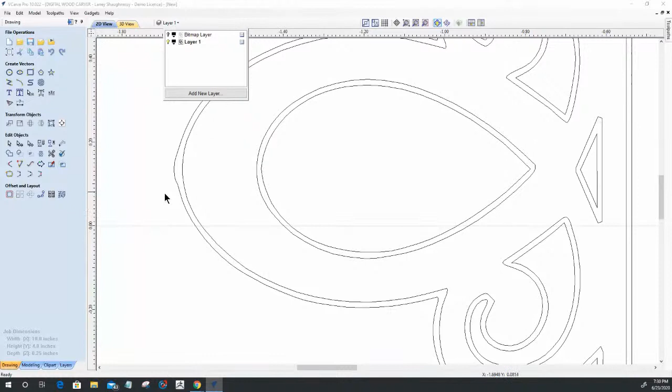So we'll crank this up to 4, then click preview, and that will trace the image. There's a couple of little nips right here on the end that we'll clean up in a minute. But for the most part, once it's a decent tracing, you click apply, close, and then turn off your bitmap layer and all you'll have is your tracing left behind. You'll see here we got a little nub sticking out there, which we'll clean up in node editing. But aside from that, let's turn that back on and undo.

There's also the black and white trace within your photo. It takes the image you have selected and converts it to black and white. Again, turn that fading off. In this case, there are no colors to trace or check off, just a slide bar that you slide back and forth. What you want is the best representation of that black and white image, with nice, clean looking lines, and then come down and repeatedly do the same thing.

I'm going to use the default corner fit, and I'll have my noise filter at about 4. Click on preview, then apply and close. Again, turn your bitmap layer off. Same steps, rinse and repeat for that.

Now, to take this a little bit further, some images are not going to trace completely clean.

Therefore, you're going to have to do some node editing. In this image, all the way around, I have some node editing to do on these corners of these triangles. They should not be blocked off like that. They should be nice lines, nice points. They shouldn't be rounded at all. That's a product of the tracing, and you're going to get that regardless of whether you're using black or color tracing.

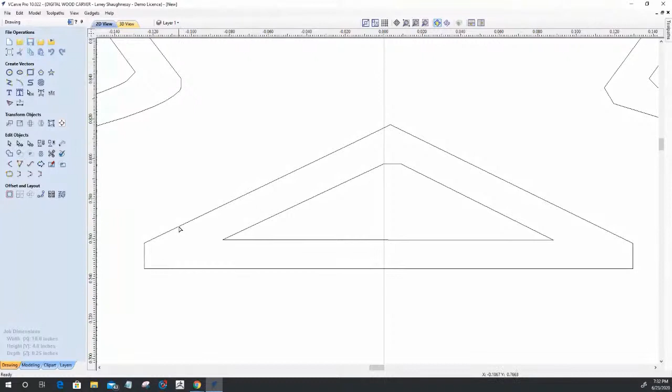In the case of the node editing, I'll start out here and end up deleting these two spans, delete that one there and that one there. While I'm in node editing, since I'm working in this area, I'll delete this span as well. A span is a line, arc, or curve between two nodes. So I'll remove that, and then I can come back with my extend tool, which is the second icon on the third row of your edit objects tools, the extend tool. I can come over here and just click, click, click to extend that, and to clean that vector up. I'll end up going through all the way around.

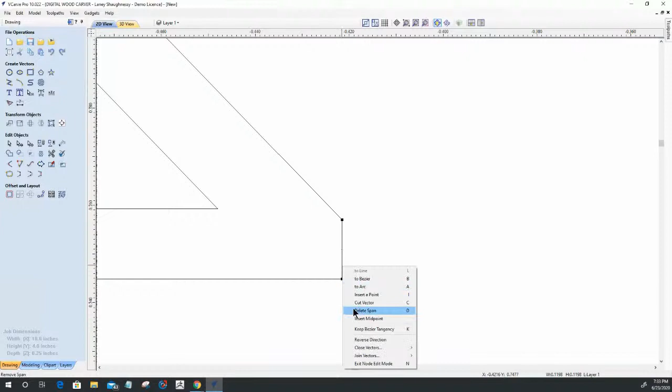Sometimes you're going to have to do that, you're going to have to clean up your lines and things. So just be aware, in node editing on the keyboard shortcut, that not everything is always perfect. There are going to be some bits of cleanup, and you can choose whether or not you clean it up or leave it be. But the higher the resolution of that image, the better trace quality you're going to get.

As far as that little nub there, I'm going to come over and cut the vector probably right about here. I'll just pick two random spots, go right about here, and I'll remove that bad segment. Then I'll take this object and rejoin it with a smooth curve. 90% of the time it redraws it exactly as I need. The other percentage of the time, I may have to go in and node edit it and do some adjusting, but that one actually came out very well.

All right, cool. So hopefully that answered a little bit of your questions on bringing an image in and tracing it. Just be sure to always close your tool when you're done, and of course turn that bitmap layer off, because you no longer need that image visible once you've traced it.

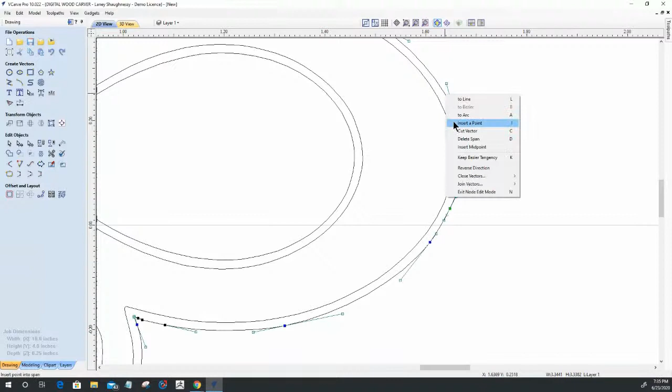And the same goes while we're here, might as well clean this one up. I'm going to cut the vector here, and I'll just pick another spot over here and cut it. Remove that bad segment, and then select that vector and join with a smooth curve.

Now that one threw the curve off. You see it kind of jumped up there, so I will have to go into node editing, and I'm going to adjust that accordingly and clean that up.

It's a little bit thinner here than over there, so let's take this and pull this out a little bit, and pull this back. I'm going to actually use the arrows on my keyboard and kind of pull that in a little. And there we go. Okay, so little things like that.

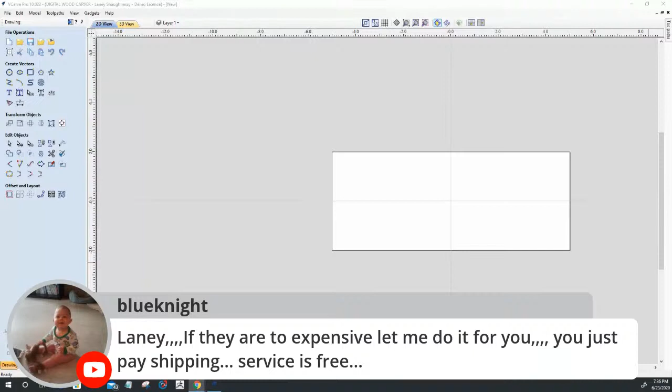Oh, the computer thing? Oh man, Blue Knight, thanks for that. I appreciate you for that, that's cool. Yeah man, I appreciate that. We'll have to link up on that one.

All right, here we go. Let's see here.

And I haven't forgot, I'll draw the circle center finder in just a second here.

Can you explain the difference of using a flat depth and not using it with a V-bit?

Well, first let's understand what the difference is between a flat depth and a cut depth. Dan, that's a great question because I get a lot of people calling me saying, hey, my V-carves aren't carving the same depth all the way through. I put in 1/4 of an inch in the flat depth and some are cutting a little lighter, some are cutting down to that 1/4 inch, and they're not understanding exactly why. So that's a great question.

Before we go any further, let me change my display settings to make things a little bit bigger in the preview. Let's go down and change that to 1280 by 720. Holy cow, that makes things big. All right, let's pop back up here. Now we can see the icons.

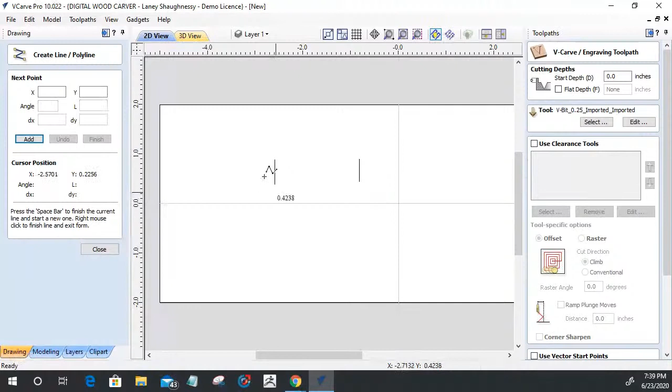Well, that is a little bit different, meaning it's not exactly the same as a flat depth in a V-carve. If you understand a V-carve toolpath, it looks at the distance between 2 lines of a vector. It automatically calculates how deep it needs to cut for those 2 lines to meet at a V at the bottom of the cut, based on the angle of the bit. So if you want shallower cuts, use wider angles; for deeper cuts, narrower angles. Based on the angle of the bit and the distance between the parts, that determines the depth of the cut.

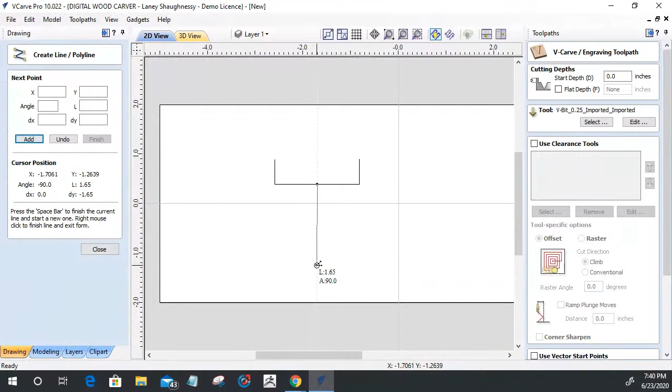Let me put in a center line here. Let me hit the space bar, finish, undo. I'm just going to draw a line straight across there and up, space bar. Let me get a center point in there. That line looks all jagged and it says 90 degrees - that's janky. Let's do that again, find my center, straight down. That line looks pretty smooth.

Okay, so a V-carve toolpath automatically calculates the angle and depth of cut based on the bit. Let's say I have a 60-degree V-bit here. If I was carving with a 90-degree V-bit, which would be here and here, I'm going to get different depths of cut based on that bit.

And so if I want to set a flat depth, what that's going to do is truncate that cut. Let's get rid of the 90, we'll just work with the 60 here. Let's say I want a 1/4 inch flat depth - it's going to truncate that cut.

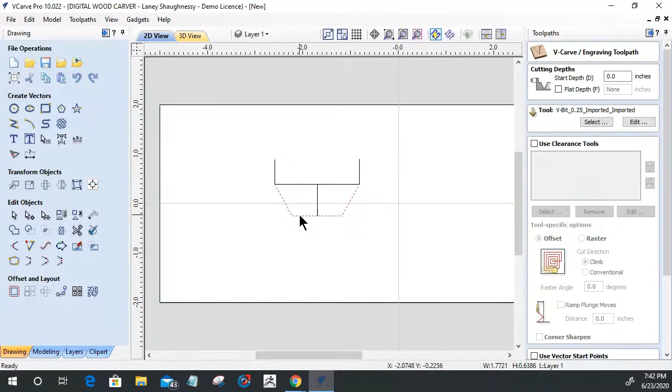Now this flat depth is a limit. If you just remember that it's a limit, not a cut depth, it's a limit. What that means is any part of that design that I'm carving, if whatever parts would normally exceed that 1/4 inch flat depth, it's going to get limited to that 1/4 inch. It'll get truncated and flattened out at that 1/4 of an inch. But if a design has smaller vectors or closer together vectors, and it's only carving an 1/8 of an inch or a 16th or 20 thousandths of an inch or whatever, those are going to get V-cut to their respective depth. But any part of that design that would exceed my flat depth of a 1/4 inch is going to get truncated and cut off. So a flat depth is a limit, and it only limits the area of the design that would normally exceed that limit. Hopefully that explains it, hopefully you'll understand it.

So a cut depth will cut exactly to the depth you specify. A flat depth will limit parts of the design that would exceed the flat depth, that exceed that limit - it'll truncate and flatten them off. So tell me, Dan B, if that answered your question.

So if you don't use a flat depth, it's going to automatically calculate the depth of cut based on the space between the lines of the design. A good example is with letters and things. So let's grab a font here.

Why is my text box not opening?

Okay, there we go. Let's go with the letter B, and let's do a true type font. And let's make that a little bit bigger.

So the space between the lines in these areas here are going to be a shallower cut. The space in these lines are going to be a deeper cut. So that's how you get those different depths of cut when you're doing a V carve, because the space between the lines indicates, and the angle of the V bit is going to indicate the depth of the cut, how deep it needs to cut for those lines to meet at a V at the bottom of the cut.

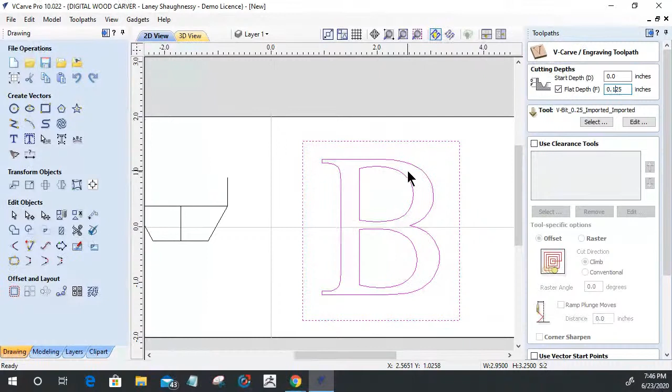And so if I limit this, let's say to 1/8 of an inch, then that's essentially going to be the cut depth of my pocket. And whatever part of the design that's going to reach 1/8 of an inch - all of this design is going to reach 1/8 of an inch - so it will flatten or limit everything to that. And that's how we get that raised effect.

And of course, I didn't use a flat area clearance tool, so you'll see the tool marks, but all those areas between those two lines, the line of my border and the line of my letters, is getting limited to that 1/8 of an inch. And then my big letters getting raised up. Yeah, and that's how we get that raised effect.

So that's kind of the main uses for the flat depth when you're wanting to do that raised effect, or if you're limiting your cut to a certain depth of cut. Cool, I hope that helped.

All right, let's delete that.

And let's get back to here. Okay, let's see what here. Now,

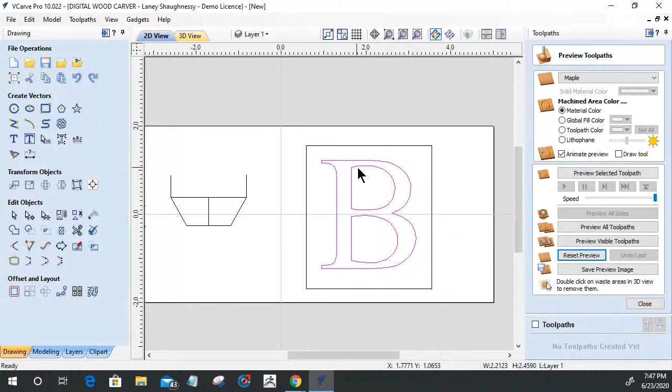Dan, I hope that answered your question. All right, let's talk about the circle center finder. Let's draw out the circle center finder here. Pop back over here a second.

My circle, I wanted it big enough that with the two little dowels in there, when it wraps around that circle, using something like a CD, let me come up here and get in there, sit in there. Oh man, I'm backwards with my camera. There was enough of a span that I could get some nice seating and everything. And there's my circle center finder right down the middle. Look at that.

So the size of your circle center finder, and also its length, is going to determine what size circles you're going to be tracing. I believe my overall length on this was 8.5 inches, and I went with a 2 3/4 inch diameter circle. So if we were to replicate that, let's go with 2.75. That number wasn't specific to anything, it was just the size I needed to use.

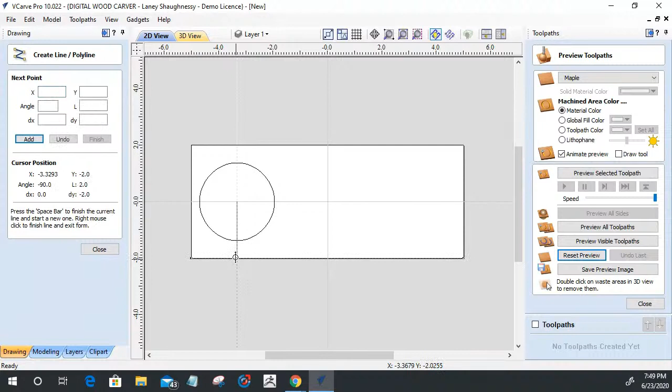So for overall length, let's go from the center here, snap to the center, and I'm going to come out. I'm not going to be able to get my 8.5 inches out of that, so we'll go 8 inches, which is fine. Space bar to finish.

Basically I wanted a small radius on the tip there—a little bit of a radius on the tip. So we'll go with 1/4 of an inch, 0.25, and snap that there. So it's going to end up being like an 1/8 inch radius because it's a 1/4 inch diameter. But if we take our line tool here, I can click on here.

I didn't want to snap to there, I wanted to snap to the side there, buddy. So undo, let's try that again. Bam, there we go. And if I hover my mouse over here, I can hit the letter T on my keyboard and it'll snap to the tangents, and then I can use my space bar.

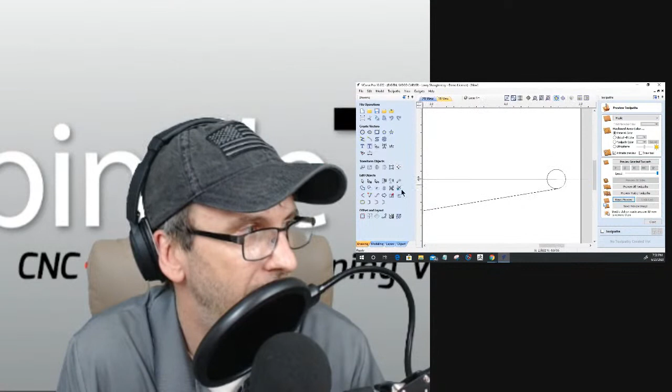Then it's going to be a matter of cleaning things up. But before I do that, I need to extend my line from here to here. And then I can come in and use my trim tool. Oh, shit, ladies and gentlemen, we're an idiot.

All right, let me undo that real quick. You guys couldn't see anything I was just doing, so let's start over again. We'll go with our 1/4 inch, drop that down there. That's good. And then 2 3/4, 2.75, we'll pop that down there. Oh, I was so close to being right on the edge of the board. Let's move that over a little bit.

All right, we're going to take a straight line from the center of this one to the center of that one. Space bar to finish. Then I'm going to snap to the edge of this circle here, hovering over it without clicking, and hit the letter T on my keyboard. It'll snap to the tangent lines, and then space bar to finish.

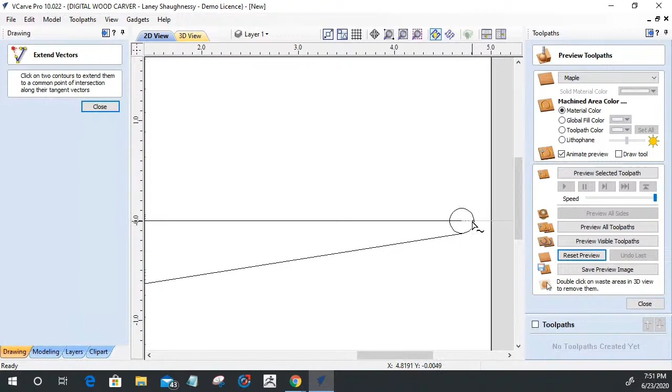And now I can come in and do my cleanup. I'll take my scissor tool and clean this up. Wow, wow. I've got to extend my line—hold on a second. Extend tool from there to there, from there to there. And I can trim that up.

And yeah, there's your circle center finder. Now as far as the placement of the two dowels, I used 3/8 inch dowels for mine. Actually, hold on, let me measure. 7/16 inch dowels. Which 7/16.

So basically the placement really doesn't matter. You want them centered, or kind of centered within this circle, so they wrap well. So we'll back off, center right about there and there.

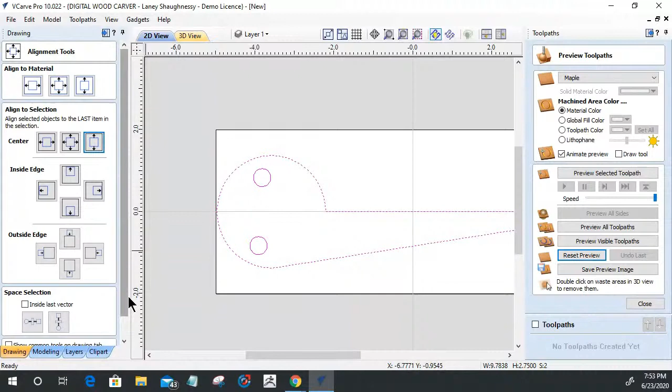And I'm going to take these two objects and group them together for a minute. I'll take this object here and use my alignment tool to align up and down, kind of get them center spaced. Then one of the crucial things is making sure they're aligned with each other. So let's ungroup that—I'll hit letter U on the keyboard, and select this one first. That's fine.

This one second, and I'll use that alignment tool and align left to right to get those into alignment together. And yeah, now you can decide on, as far as the outer profile, you can decide if you want a larger radius or what shape you want.

If you don't want it such a dramatic angle here, what's the main important thing is this line right here. That's your center line and stuff. Now, one of the key things is you don't leave this circle here, right? We want a nice 90-degree line here. So at the center of my circle, let's take a line here and find the center of my circle and come straight up.

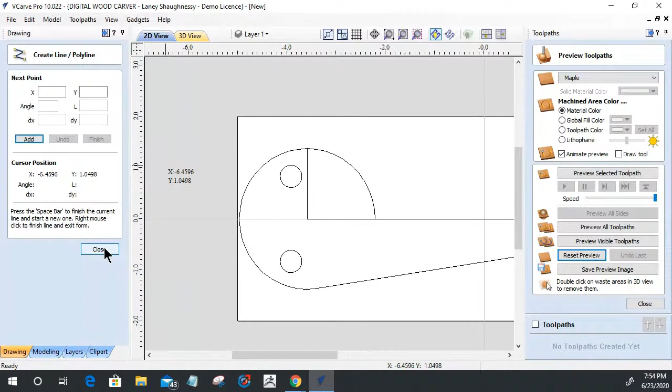Space bar to finish. We'll draw it out here too. Kind of connect those two areas together. We'll take our scissors, trim that up.

And then right here on this corner, I want my router bit, when it comes to turn that corner, I want to create a little relief for it. So I get a nice 90-degree corner with no radius right here. So I'm just going to use the fillet tool. I used an 1/8 inch bit to cut this out, an 1/8 inch end mill, so I'll have a 1/16 of an inch radius.

Not too many decimal points. And I'm just going to put a little fillet, dog bone fillet right there, and that will allow the bit to come. It'll give a place for the bit to escape, and then it can make that 90-degree cut.

And that would be your circle center finder. So if we compared, let me get back over here. So if we look close, oh, here, what would be the better? Here, let me see here. Where's my focal point? All right, so you can see that little fillet. Let me get something behind it.

Either my camera's blurry or my eyes are blurry, one of the two. Let me find my focal point again. Focus, dude. Focus. Why is my camera not focusing for me?

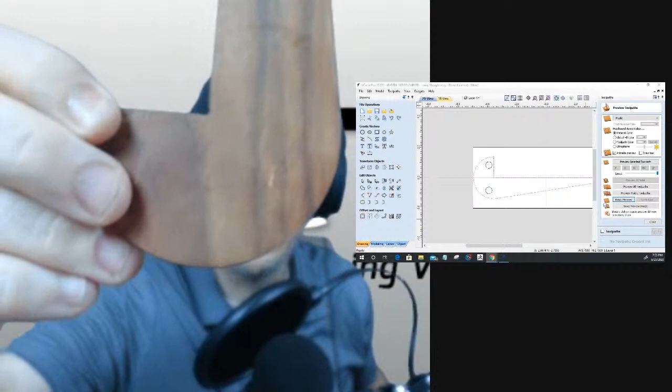But as we zoom in nice and close, a little closer, you can see that little dog bone fillet right there where the router bit has a little place to escape.

Wonderful. And, you know, just the placement of the dowels, really I just come off the center line a little bit, right? So I want the dowels to come off the center line a little bit, have a little bit of meat from here to the edge of the dowel and all. And then just make sure those dowels are centered and make sure they're aligned with each other. We don't want anything kind of skewing it off, throwing it off.

But it's a very simple tool. It takes less than a minute to cut out and glue in the dowels. I used, what did I use? Bloodwood and some cheap birch dowels from Lowe's, right? So, just a little scrap piece I used. This piece of scrap wood, I believe it's a 1/4 of an inch thick. Yeah, 1/4 inch thick. So it's just a nice little tool to have in the shop.

I love making little DIY tools and stuff. I got a big circle cutter for my other router that was made and all, but it's really straightforward for creating a nice little circle center finder. And it's great for finding the center of circles.

All right, all right, all right.

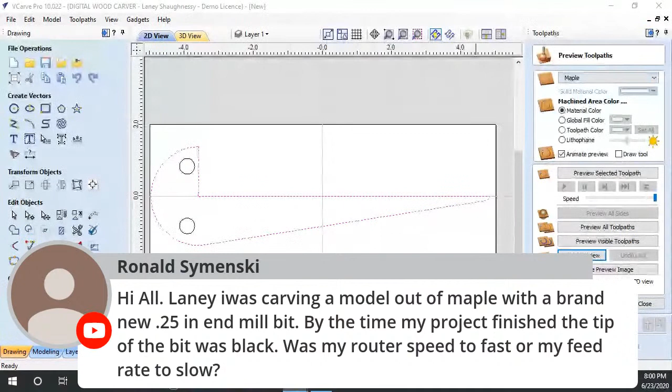I'm not sure exactly what you were running or what machine, but as a basic default for a 1/4 inch end mill: about 55 inches a minute feed rate, about 22,500 RPM. From there, you increase your feed rate and decrease your spindle speed until you get a nice looking chip coming off that piece of material.

Once you find that—if you go too far, if you're going too fast, the cut will start to deteriorate. So if you increase your feed rate and the cut improves but then starts to deteriorate, back it off a little bit.

Same thing with the RPMs—if you bring that down too slow, it's going to deteriorate the cut. It's not going to shear, it's going to more tear through. You've got to bring that RPM back up and find that happy medium with nice chips coming off.

And you don't want chatter. If your CNC is chattering when it's cutting, the bit just can't keep up with the feed rate—you're going too fast, and the bit's not spinning fast enough to clear that material. It's kind of a dance, a waltz, between the feed rate and all that.

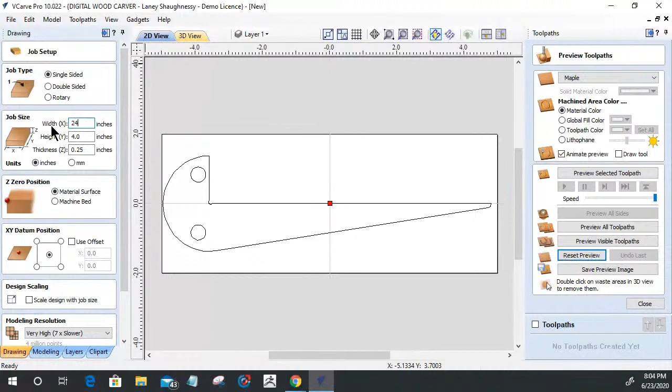let's change some things up here. Let's go into our job size, and let's increase things a bit. Let's go 24 by 24 by 3/4.

Click OK. Let's get rid of our circle center finder. I think you all get the gist of that - pretty straightforward. The center of your circle is where your lines meet, and then you put a little fillet there. That's the magic of it all. How wide you want your tip determines the radius of that curve. All right, I think we got that.

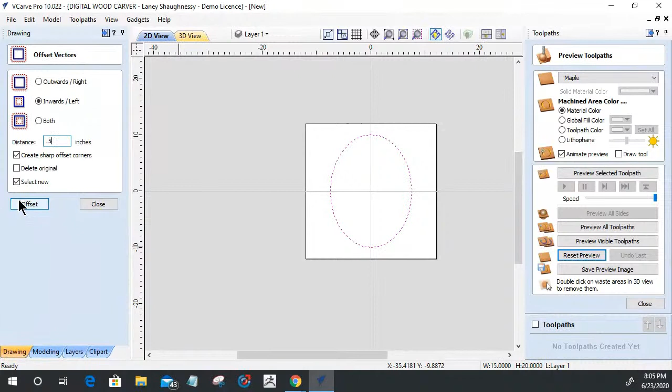Let's start here, and I'll use an ellipse. Let's come in here and throw an ellipse in here. Let's offset that inward by... let's go 1 inch.

All right, wonderful. Now I'm going to import a vector into the design, and it's been a while, so let me see if I can find the correct location for the vector. It's in my backup drive. All right, there it is.

Let's find a cool letter here. What would be a cool letter? We'll go with the W. Import. All right, so there's my W there.

Let's size that bad boy up. Hold on to your horses. Okay, not that big. Let's size that down some. Move that over here. Let me change my ellipse a little bit. Let's hold down the shift key, scale that up a little bit and out a little bit.

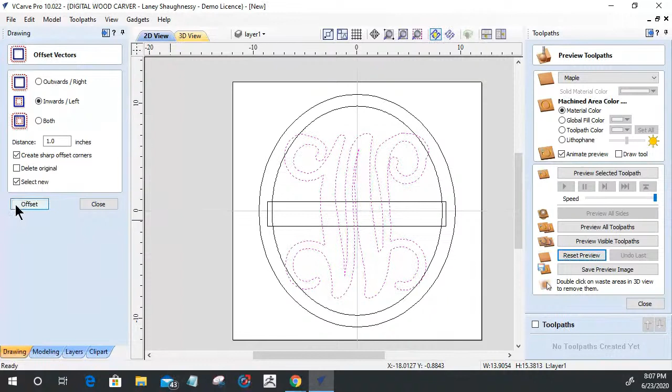All right, so let's see here, what's a good... sorry if my audio blinks out on you guys. Let's offset this rectangle inward. Let's go, I don't know, 1/4 of an inch. Oop, not that one, you silly goose - the rectangle. There we go. Yeah, let's go 3/8, 0.375.

All right, let's take these two rectangles here and make that just a little bit taller. I'm going to hold down my shift key and kind of pull that up a bit. Right, something like that. All right, so let's say that the last name is - okay, let's close one of these.

We don't need both of these windows open so you guys can see things. All right, let's see here. Watsons, right? Waltons, right? Let's do the Waltons. The Waltons. All right, cool. Let's get the Waltons in here.

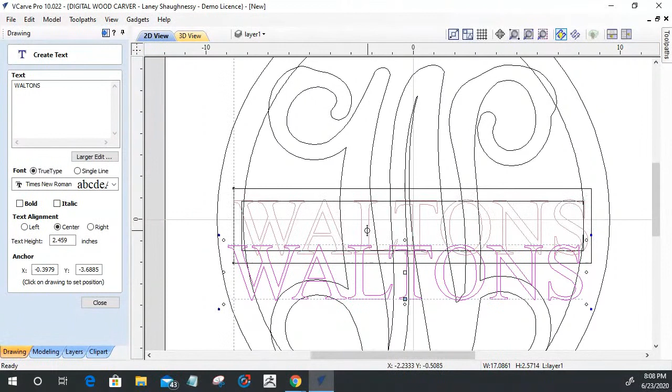And what I'm going to do, I'm actually going to close that, and undo that, because I'm going to use this rectangle right here to draw that name. So I'm going to use draw vectors, draw within a vector box, the text, and I want to use that vector box as the boundary. So that way when I type in... I might be going off the rails here, guys. This might not even be answering any of the questions you were referring to, but hey, what the heck.

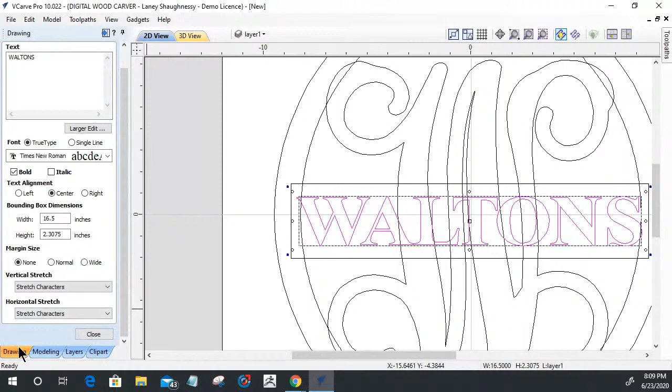Let's see, pick a letter, any letter. We'll use... I'll use Times New Roman. That's fine, we'll go bold, and I want no boundaries, so I want to stretch it out to there. And then I want to extend - I want no boundaries, and I want to stretch my characters vertically and horizontally on that tool so that it extends out completely to that rectangle.

And then where the magic takes place, I want my top line here and my bottom line - I want those to overlap ever so slightly on my letters. So I have a choice: I can either stretch my letters or move my box. I'll just stretch my letters up a little bit, so I'm going to stretch them up to where they just pass that top line right there in that rectangle. And I know the W is behind here - let's move the W for a minute.

And then down here on my letters, let's pull them down. I just want a slight bit of overlap right there on that inside box. All right, and I'm going to pull my letters inward, and I'm not holding the shift key there. There we go - I'm going to pull the letters inward slightly, right about there. That looks fine and dandy.

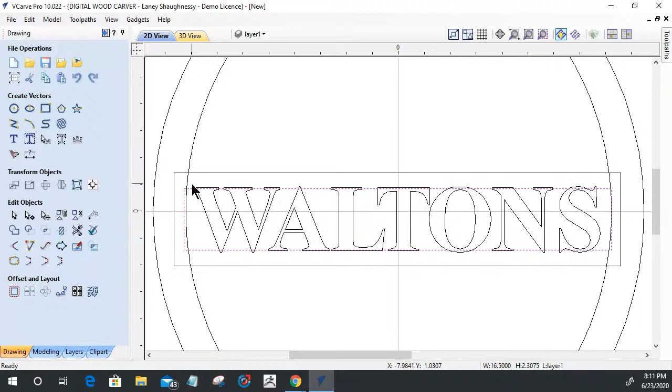If I use my letters as a boundary and take this rectangle, clearing it from within that boundary, it's going to redraw the rectangle around these letters. It's a magical thing. I'll use the trim tool, not subtract, and select my rectangle first and my text last, holding down the shift key, which makes my text the boundary. Clearing inside that boundary will redraw those vectors around the text.

If I came in here and deleted the text, what do we have? We have an outline of the Waltons, right? Pretty snazzy, slick stuff there.

From there, I can take my interactive trim tool and make this all part of the boundary. So we'll clear away this area here, and that connects those in over there. Clear this away, trim that, and that. I don't need this little outside ledge or that little outside ledge. Let's look over here—do I need anything? Yeah, that's all good there. So now I've created this little center medallion.

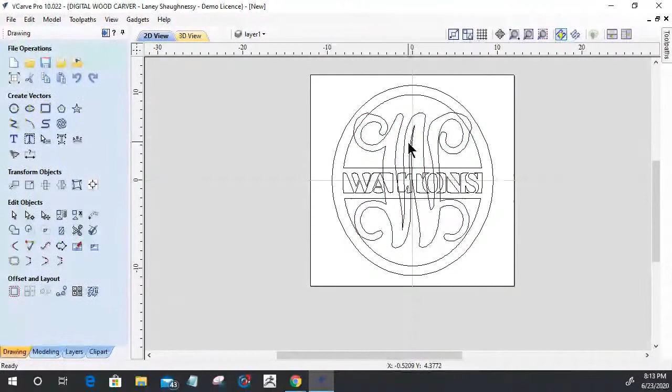Now let's get my W back aligned center to my material, in place. I'm going to drop it down ever so slightly so it's just off center—bump it down to where there's a slight bit of overlap, not much, just so all four of my Vine monogram letters can flow in there. Once again I'll take my trim tool and connect them to the border. I might be going off the rails—this might not even be close to what someone was talking about as far as a family monogram, but we're getting there.

Now I need the letter here to basically be connected to this boundary. I need to get rid of everything on the inside of this boundary here, which I can easily do with the trim tool, connecting these things together.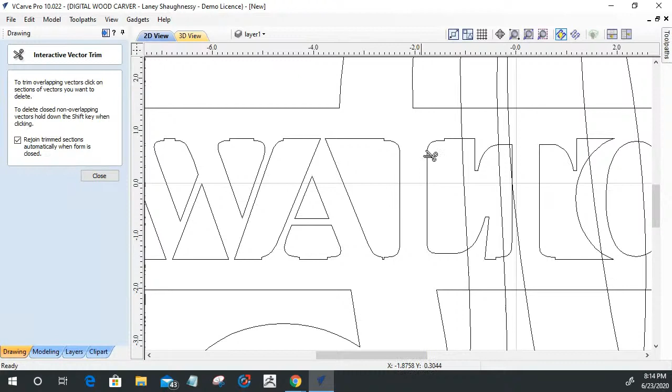Basically, I'm just going to take my scissors and clean this up. Make sure you don't miss any of your little dashes and things like that. Right here in the middle, we'll get rid of these lines, get rid of those lines, and then just work your way down. Make sure you get rid of your vector lines, all that nice jazz. Don't leave any stragglers up here.

A couple more lines—let's clear that out. Get rid of, oh, don't do that. Let's come up here and trim, trim, trim, and then get rid of that line, and these two little stragglers here. All right, let's see if I missed any. No, all right. And so I did miss something.

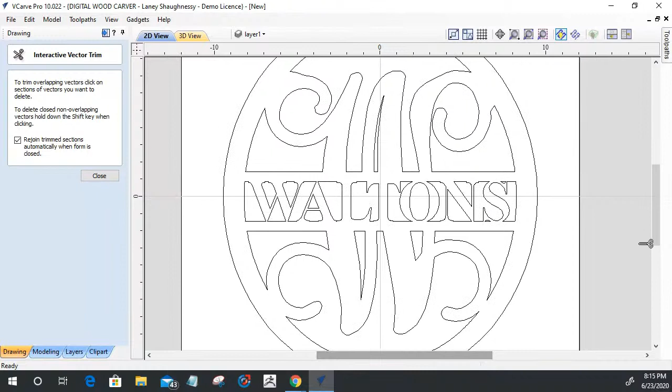Whoa. No, that's correct—the T just looks a little funky because it's missing that top part. So there's the Waltons, right? So as far as a family monogram, if that's what you're referring to, that's kind of a quick and dirty look at making one.

And those Vine monogram fonts, that's what this here is. You can find those online at places like Etsy—Etsy has some great Vine monogram fonts, all about $7 for the files, and they're all vectorized SVGs. And Bob's your uncle, right?

So with a cut like this it would be a profile cut. We'll select all of that—it'd be a profile toolpath. I've got small, tight areas in here, so I want to use a small diameter bit. The smaller the diameter of the bit, the better results I'll get in these letters. Of course, I've got this set up for a 3/4 inch board, but it would most likely be cut out of 1/2 inch or something along that line—not too thick, because too thick it looks bulky.

I'll use a 1/8 inch end mill for this. My go-tos would be either a 1/8 or a 16th inch end mill for monogram letters and stuff like that.

I want to get really tight in there, but I have to make sure my bit can exceed the thickness of my material. My 16th inch end mill only has a maximum cut depth of a half an inch, where my 1/8 inch end mill has a maximum cut depth of 1 and 3/32 inches.

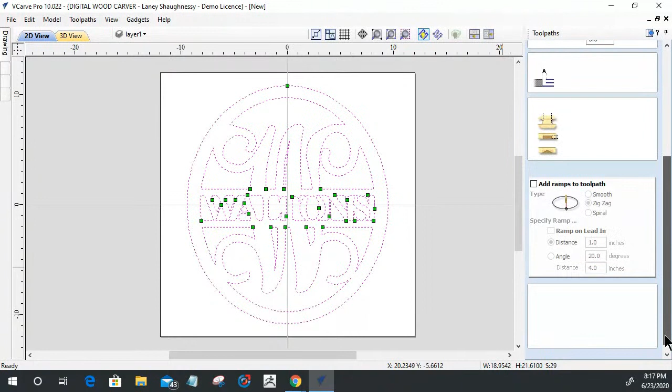So if I were to calculate this cut, I've got one open vector that I didn't close up. Let me figure out where it is. Select all open vectors — notice it doesn't show me right away. I can see it here visually, but you might not be able to. If I zoom to the selected object, since I just told the software to select it, it'll zoom right into that vector. That's just that line right there that I need to delete. So tell it to select the open vectors, and if you don't see it on screen, zoom into the selected object, and there it is.

Preview that visible toolpath. I didn't add any tabs to this — this is just for preview purposes only.

Maybe that was informative for you guys. Maybe it wasn't. Maybe I went off the rails completely on that.

But a family crest is a completely different process for laying that out. Again, would you lay it out as a V carve, or as a 3D model? If you're going to be modeling, it would require Aspire. If you're going to do V carve, no problem — you can do it in all three. But you want to figure that out first, and then find your family crest and try to find a good reference source, an image and all.

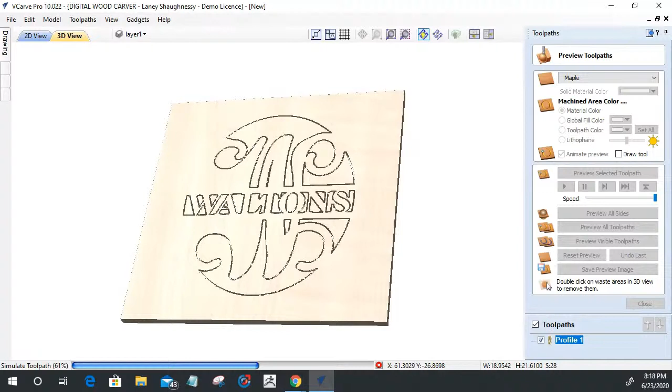So Edward, as far as a family monogram — not sure if that's what you were referring to — but I think most people think of monogram letters when someone says monogram. You might have been thinking of a monogram like a symbol, something you'd see on a ring or a crest or what have you. That was kind of my interpretation of it, so let me know if I was wrong.

Let's see here. Edward says — okay, I'm reading now — a large letter for your last name, with your surname in the middle, in a different font, running left to right on top of the large letter. Well, there you go — I think I nailed that one right on the head without even reading that comment. Did he not just say a large letter with the last surname running across the top? Did I not nail that, ladies and gentlemen?

I'm going to double click and let's get rid of all these waste areas here and see how our monogram looks. Let's get Edward's — that was funny.

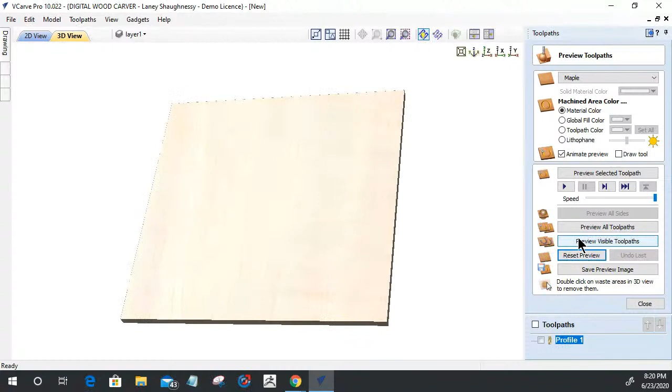Let's get rid of these waste areas. Whoa, dadgummit, don't double click. And there's no undo button on the undo delete, right? So as we continue talking, we'll run that again. Watch where you're clicking, because it'll delete the things you don't want to delete. You want to delete the waste.

All right, so Ronnie Probert says: Hey Laney, I'm creating an oval sign. I have cut the wording cut. Do I need to go back to the center to zero out? Can I go to the end of the board to zero off? This is a great question.

So you're talking about your Z0 position for your bit changes, Ronnie. A lot of people really get this wrong and have a hard time understanding. Let's say my job is designed to start X, Y, Z, where X, Y is the center of the board — that's where I bring the center of my bit and zero out my X and Y. But if we look at the job setup, it's for either the material surface to be Z0 or the machine bed to be Z0, whichever of the two options you choose. In this case, I'm referring to the material surface.

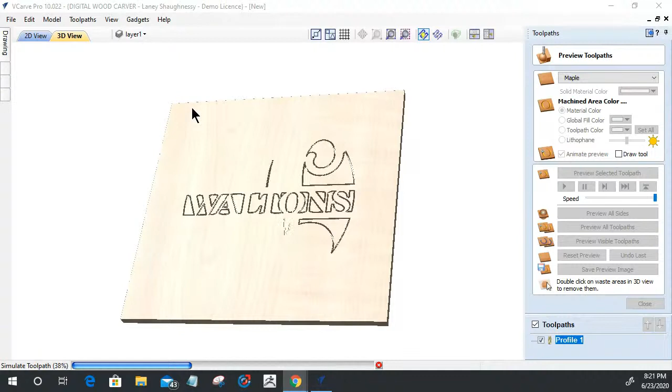So that means you can touch your Z off anywhere on your board. If you do a bit change, it carves that first part of the design, then comes back home to XY0, and stops at whatever your default home start position's Z height is — 0.8 in this case. That's your safe Z position that it returns to. From there, you can move that router anywhere you need to.

Take that bit out, put your next bit in, and anywhere on the top of the material that has not been carved away, you're going to set your Z. It does not have to be in the center where you start from. The material surface is your Z0, meaning all of the material surface, because there's going to be many times that your center gets milled away.

The one crucial thing you do not want to do is reset your X and Y on a tool change. Your X and Y is set at the beginning of the job. You touch off your Z for that first tool, you run that first tool path, it comes back home. You take that bit out, put the next bit in, and only touch off and set your Z. You leave X and Y alone. So even if you move over and touch your Z off, you don't have to bring the machine back home before you hit start, because that is the first line of G code.

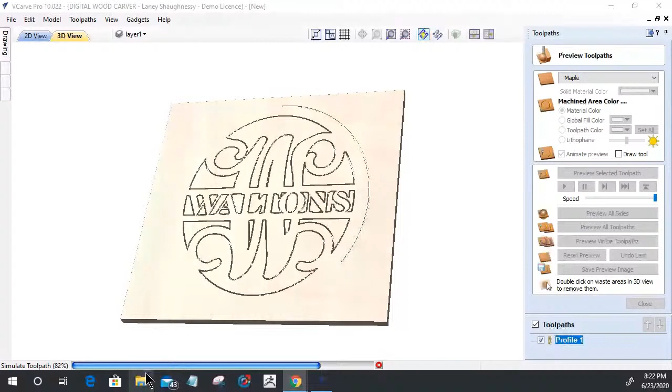Let's open up a toolpath G code here. Let's see, what do I have, have I saved any toolpaths lately? Documents.

Let's open this up in Notepad. Never mind, that's a laser cut. Well, even that still does the same thing, but let me find something that's not a laser cut.

Sample. Is this one a V-bit? I believe it is, there we go. Okay, so if we look at the toolpath, oh damn, that's a laser cut too. Hold on a second, why do I have so many laser cuts going on here? Robert, let's see what old Robert's got going on.

There's a V-bit, all right. So the first line of G code when you hit start is going to raise the Z up to a safe Z height. Then the next immediate line checks to make sure it's at home, XY0. If it's not, it will return home. Once it returns to that home position, it will turn your router or spindle on. If it's a spindle, it'll ramp it up to your spindle speed. Then it's going to move to its first location and then come down and start carving.

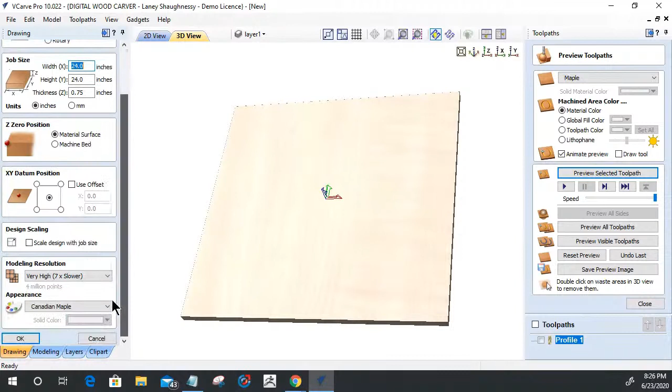Okie dokie, all right, let's get back. Fark.

All right, you guys saw what that looked like, right? We don't need to do that again. That was crazy, I'm sitting there, I opened up that tool and it reset everything.

All right, here, let's make it quicker so it's not so long while I'm talking. Toolpath, preview simulation quality, we're going to turn that down to standard. We're going to crank that toolpath out with a low resolution.

So Ronnie, hopefully that answered your question regarding, do you have to reset the 0 on the XYZ? No, you can reset the Z0 anywhere on the top surface of your board.

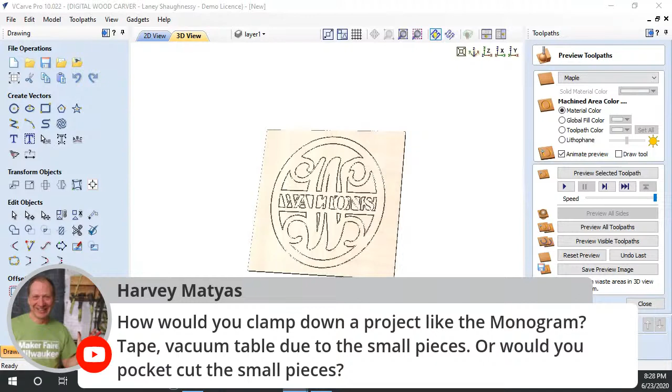I'm looking at how would you clamp down a project like the Monogram on a tape vacuum table due to small pieces, or would you pocket cut the small pieces? Would you add tabs or anything like that to the bar? And also, how would you clamp it?

First of all, on my large piece here, I would most likely have 4 tabs to hold that into place, so that when it cuts free on that final profile cut, it doesn't cut loose. On my larger pieces, I would add a couple of tabs to hold them in place because they have a tendency to shift. And if they shift because they're so big, the bit most likely wouldn't be able to throw them out, and they could bind and cause the bit to snap.

I'd probably throw a couple of tabs on the bigger parts, but the smaller parts, I just profile cut them, and they'll typically fly out when they get cut, so I'm not too overly concerned about them. I do not add tabs on these smaller parts you see me removing in these areas.

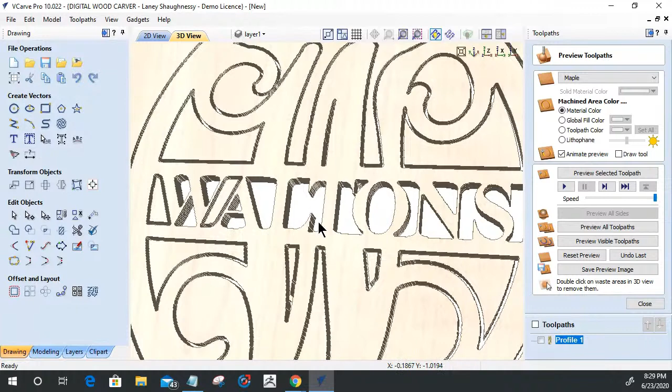But how would you clamp it? I'm an advocate of double-sided tape. I like two-sided tape. I'd probably have 3 clamps for this one. I have cam clamps on my CNC, so I can throw 2 cam clamps on one side and one on the back, and it pushes up against the fence. But two-sided tape would be a good option.

Don't coat the whole thing with 100 pieces of two-sided tape, Lord of mercy. But a couple of strips that go around the main areas - if you're going to use two-sided tape, definitely a strip running down the middle, because that'll catch all these smaller parts and hold them in place.

But on your larger pieces, I want to give you the advice to throw a couple of tabs in there. Not a whole lot - you don't need a million of them. One or two here or there would be a good option. But the two-sided tape, hot glue is a good option too - 4 little dots will do you and hold it down.

But again, the main thing, Harvey, is so the parts don't come flying out. And would you pocket the parts? No, I wouldn't waste that kind of time. It's a profile cut all day long.

The smaller pieces are going to end up so small that they'll just fly out. The larger pieces have a tendency where they're not going to lift out, they're going to bind. So I'm going to throw a couple of tabs on those larger areas, not too many - just enough to keep them stationary while they're getting cut out. Then I can cut those tabs and sand them down. But I would not want to tab the inside here, and I usually don't.

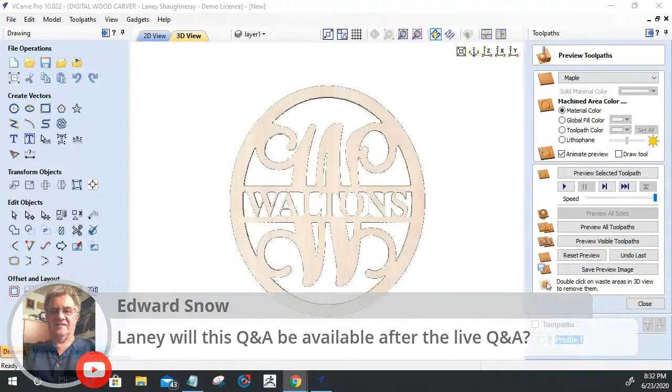Oh yeah, Big Fish, that might be the guy you're talking about, Cecil and Ed, with the Monogram stuff. I'll have to look up some of the things that he does. Now, if you're talking about a V-carve monogram where text is on top of text, like Walton's would be on top of the letter W, and you were V-carving that monogram, that would be text on text, and we can do a tutorial on that sometime. Pretty cool method.

Let's see here. Michael Bell: Laney, when deleting waste material in the 3D view, if you accidentally delete something, use undo last to get it back.

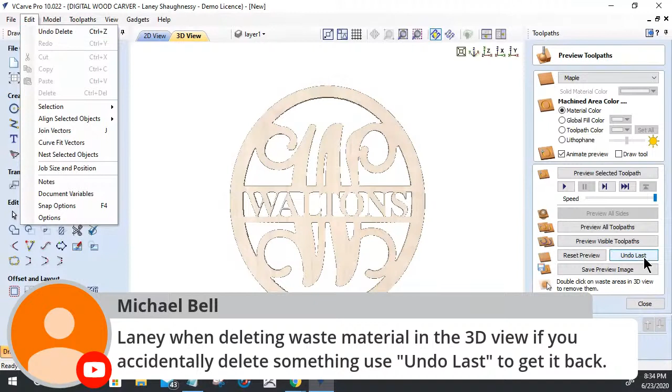Hold on a second, Michael. You're talking about the undo button here? Like undo delete? Now remember, I just deleted all these parts, right? And if I hit undo delete, that's not undoing it. Oh wait, undo last - how come I've never seen that button before? Michael, you're a genius. Hold on a second. Let's see here, undo last. Look at that, it puts it back.

Oh Michael, you're the man. Why the hell have I not - I usually just reset preview, I've never really looked at that button. Undo last, that's great, Michael, thank you. Look at there. 5 years, ladies and gentlemen, going on 6, I've never paid attention to that button. Undo last is great. So it undid the last thing that I did in there. So if I accidentally deleted something that I didn't mean to, undo last - look at that. Slick. Thanks, Mike, I appreciate you, man. That's cool, very cool.

See there? I'm even learning something on the Q&A. All right, let's see here.

How do you decide which bit to use when you V-carve something? Landis, that's a great question. A lot of people struggle with what bit would I use. I actually did, Landis, just something else you can refer back to - a couple weeks back I did a video on this exact topic, how to choose what bit to use. The first 15 to 20 minutes of it discusses V-bits and everything.

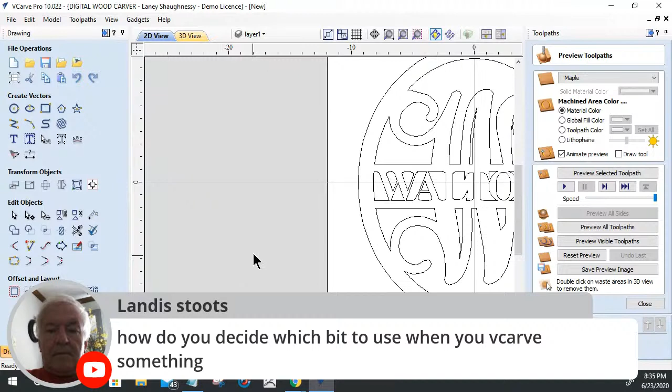What's going to determine what bit I use is, let's say on this design here that I was V-carving it, and I'm only carving out of, let's say, 3/4 inch material. These wide areas here - let's pull that up - if I were using a 60-degree V bit, the cut depth would be so much that it would want to cut through the material right at that peak here. If I was using a 22-degree, absolutely. A 90-degree would be pushing it, I'd probably still be cutting deep, but a 120-degree V bit, I'd get a nice shallow cut. So if I wanted a nice V cut on this and didn't want to add a flat depth, didn't want to limit that cut anywhere, then my angle is going to get wider.

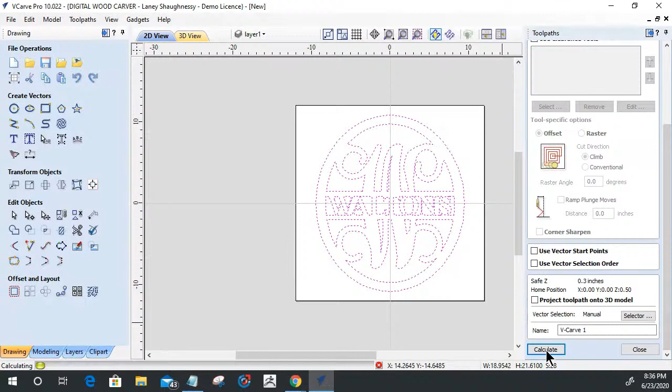So if I went to V-carve this tool path and don't want any flat depth, and let's say I'm using my 60-degree V bit here - which I believe that's my 60, it is - if I go to calculate this, I might get a warning. Yeah, there we go, it's going to require 2 inches of material to cut through to V-carve this.

And if we look at this, in these heavily blue areas, especially here, let's reset this preview and preview that cut. All right, you see that shallow cut that's happening right there? I'm going to stop that. Why - I was wondering to myself, why is that doing that?

It's because of this imported tool right here. I chose that tool down here from the list that came from Vectric or whatever, and it's not carving properly. So what do we got here? It is carving properly - what the hell? It shouldn't be flattening those areas out like that.

Oh, this is a 24-inch by 24-inch board. Never mind, I'm an idiot. I thought this was smaller. I'm like, why is it carving like that? I forgot I made my board 24 by 24.

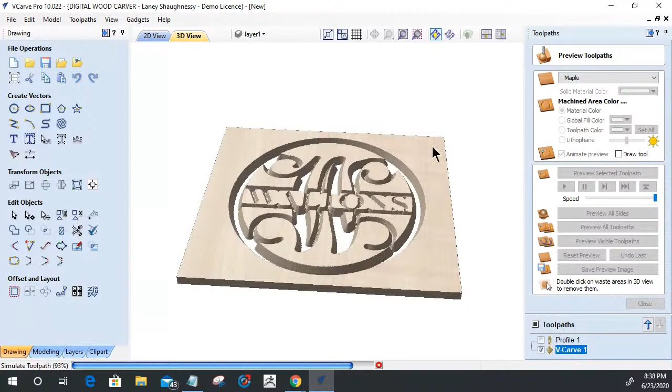So the 60-degree V bit does have to clear out some of those areas. In those areas, especially right here in the V, it's going to require about 2 inches of depth to cut through. So you can see absolutely where everything is cutting through, right? So we would have to limit that.

But if I didn't want to limit that cut, and I wanted a nice V cut without limiting it, my V bit would have to be wider diameter. In this case, we'll go with a 90-degree, 1.25 inch diameter bit. That should do it. Either that, or I'll need to go to my 120-degree V bit. Let's use the 120-degree, 1.25 inch V bit and calculate that.

No warning popped up, right? Preview that selected toolpath, and it's going to cut to a respectable depth for the design. This is not the raised effect I was talking about. As far as the monogram, this is just an example of text on text. So that 120-degree V-bit, because of the angle, required a shorter depth of cut. It took less depth to cut to that V shape we talked about earlier, and therefore I'm not cutting through the material.

So choosing what bit to choose is really going to be design based. What is your ultimate goal? If I'm using a 60-degree V bit on small letters, I might not get enough depth at all, with no real definition in that cut. So then that's going to make me change from a 60 to a 22-degree, 11-degree, or 30-degree, smaller diameter bit, so I get a deeper cut and more definition, right? It's really based on the design.

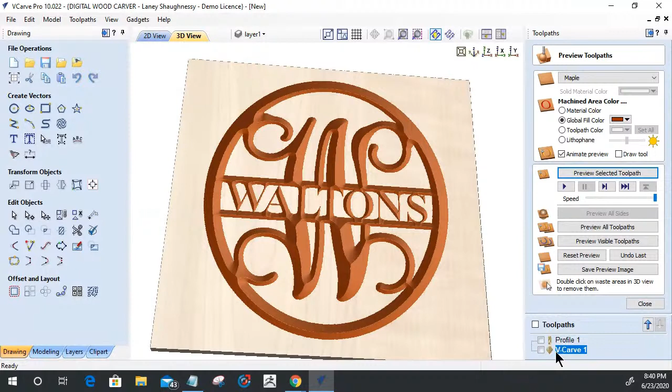I know that was a roundabout way of answering, but basically my 60-degree V bit was cutting through the material. Therefore, I needed to increase the angle of that cutter to maintain a V cut instead of limiting it. So I increased that to a 120-degree V bit. And even with that 120-degree V bit in my main areas, I'm still cutting down to 5/8 of an inch deep, so I'm almost punching through my 3/4 board.

Hopefully that somewhat answers your question, Landis. But it's based on what your end result is and what's required. My go-to bit for all my V carvings is a 60-degree V bit. Very rarely do I use a 90-degree. On occasion I use a 20-degree because I'm working with smaller fonts. But my go-to is a 60-degree. If I'm working with a big design with wide lines and I want a decent depth of cut with a nice V prism cut, especially carving in acrylic with large letters for edge-lit acrylic signs, then my 120-degree V bit is going to be my go-to for those.

William asks, when you're in node editing mode, how do you add handles to a point that doesn't have any? Well, let's see. If we go into node editing, let's find a node that doesn't have any handles. When you're trying to add handles, William, that is called smoothing. So if I right click on this, we can smooth that point, and then it will convert that and add the handles so you can address it.

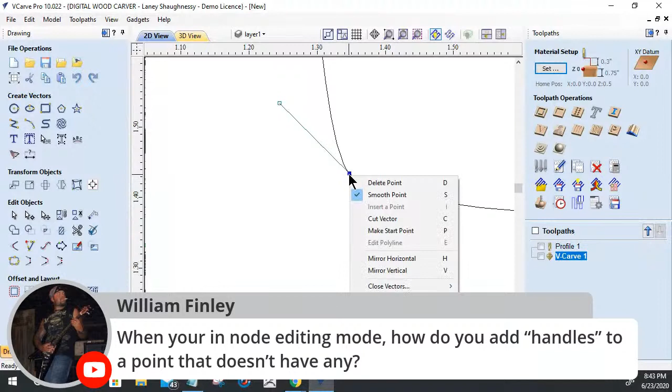And if a point had handles on only one side, adjusting one side of the curve, if I needed to smooth that out to where it's adjusting both sides, I could smooth that more and get that second handle to tighten things up. If I wanted to get rid of the handles, I'd just turn off the smoothing. It doesn't get rid of the handles, but makes it more rigid. Or I'd ultimately change it to a line or object to get rid of those handles, then change it to a Bezier curve, which gives me one handle on that side. But if I come over and smooth the point again, now I've got my two handles. Hopefully that answered your question.

Smoothing the point.

To get a good cut, the wood should be flattened, so the depth gets cut evenly over the surface. If it isn't flat, you won't get the same shallow carves. A lot of people think, oh, I don't want to waste time doing a surfacing tool path before cutting a project, or sometimes they can't do one.

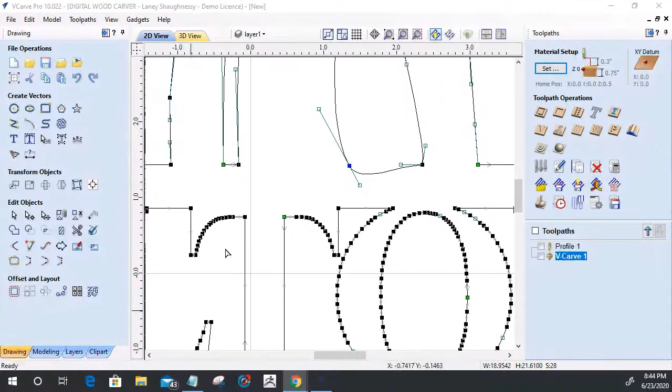They might char their material to get that wood-burn look. What I recommended to someone the other day who did that is to do a surfacing tool path first to ensure you get a nice parallel plane to your router on your CNC. After surfacing, you can take the board off, char it, whatever the case may be, and then put it back on the table. A surfacing toolpath ensures you're creating a parallel plane to your router, and it makes sure that cut is consistent throughout the entire piece. Good point there, Mr. Blue Knight.

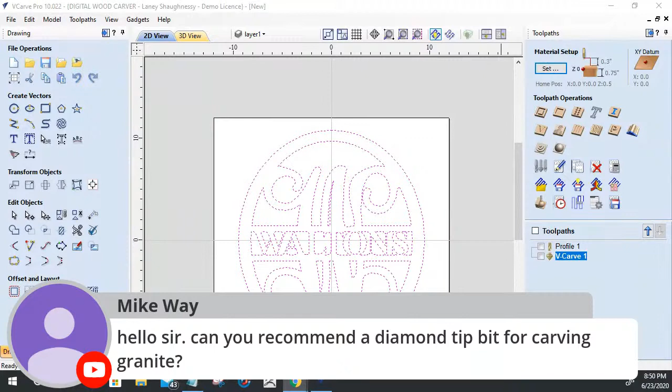But check out toolstoday.com - T-O-O-L-S today, T-O-D-A-Y dot com - and look at some of their diamond tip bits and things. A little pricey, but that's a judgment call you'll have to make. I would check out our diamond tip bit and holder - the spring-loaded holder with one bit tip is $75, and after that each tip is $20.

Yeah, Aspire is great. Let's see here. But would you lose detail - I'm assuming Blue Knight's referring to the V bit, the different angle V bit, because that was the last thing I talked about. No, you wouldn't. Your design is still going to look the same. The cut between the lines and everything is still going to be the same. The only difference is the depth of the cut is going to vary based on that.

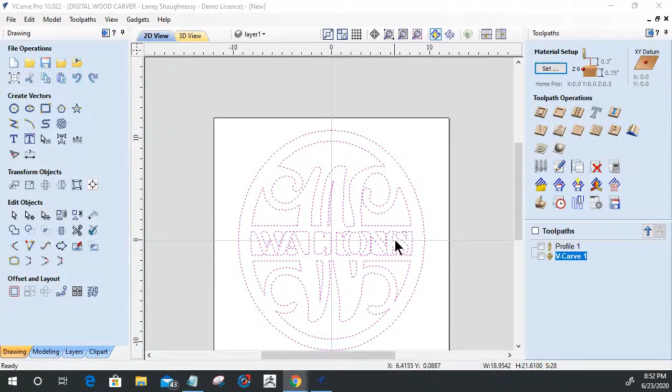So in the smaller areas, I may - let's turn off the color here, that was an ugly color, I don't know what I was thinking there. And I've got my resolution turned down real low, so it's kind of pixelated, sorry about that. But even with that 120-degree V bit, I'm getting good depth of cut here, about 3/16, a little less than 3/16.

So getting good depth even with that 120-degree V bit. The design, as far as a V carve, still looks the same as it would whether I was using a 60, 90, or whatever bit. The only difference that varies is because of the angle of the bit, my depth of cut is going to vary. So my depth of cut is varying, but I'm not losing relatively any detail. Hopefully Blue Knight, that's what you're referring to.

When doing some 3D carving, would you do a rough cut first? Absolutely, Steven. Most 3D carving, there's a 3D rough cut and a 3D finish. My ball nose bits are my detail bits, and I don't want them overworking themselves. So my end mills are the workhorses of the CNC shop. I'll use a 1/4-inch end mill or whatever size, depending on the design or model, to do my rough cut, hog away that waste material, and then let my detail bits finish up the work, lighter so they can focus on the detail instead of removing bulk material.

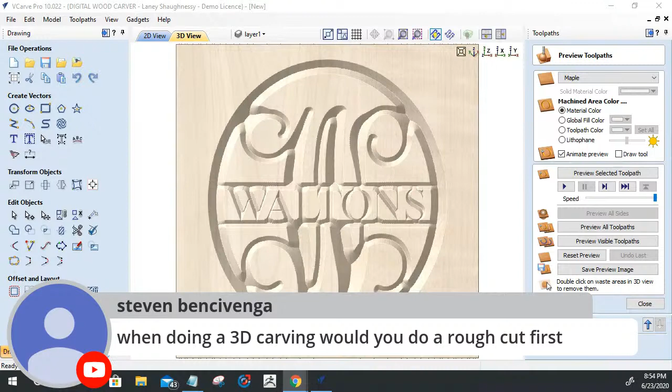Now, the only time I do not use a rough cut is when the design doesn't call for it - when the design is so shallow that a rough cut is impractical, there's no material or very little material that's going to get removed by that end mill. Then I'll just go with a straight 3D finish cut. But 98% of the 3D carvings I do, absolutely a rough cut to hog away that waste material, so my finished bits don't have to work that hard to do the detail work.

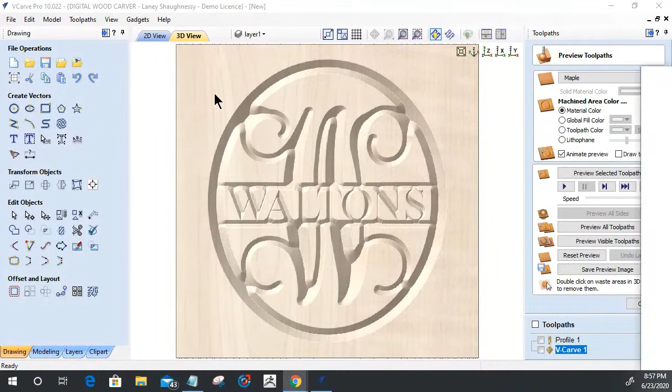Spindle TV user group, all right. For those of you that don't know, there is a user group on Facebook called the Spindle TV Training Videos, Spindle TV subscribers group.

It's such a big picture on that screen. Sorry, hold on a second. Boom, the Spindle TV subscribers group.

If you have not asked to join that group and you are a subscriber on the YouTube channel, as long as you're subscribed to the channel, you are allowed into the group. There's a question, a very simple question to get in the group: are you subscribed to Spindle TV on YouTube? Yes or no? For those of you that answered no, you're still sitting in the queue. For those of you that said yes, you're in the group. So I only have one requirement - it's the Spindle TV subscribers group for subscribers only. So if you're not subscribed, you're not getting in.

All right, this is going to take a second. While that's going, I'm going to move on with questions. This is why I didn't want to get into that, because I knew it would be slow loading. What is Big Fish's page? I don't know what Big Fish's page is, but let's close that. What is that? Again, we'll give it a chance to load up. Things have been just super slow, and I'm not happy with it, so I'll move on.

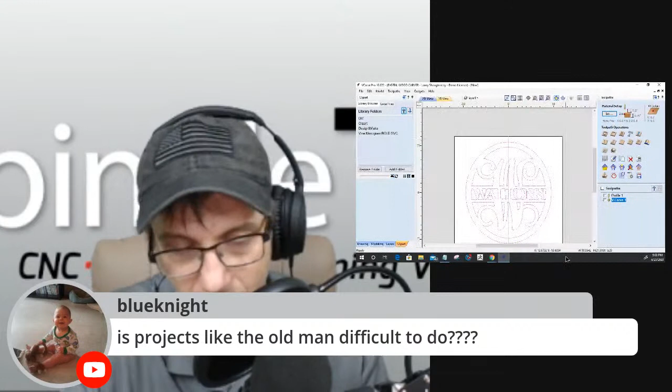We just did the knife handle a couple weeks ago, but we'll do a modeling project again, showing in the different VCarve Desktop, Pro, and Aspire how we would bring those models into a project. But just imagine, if you will, let me go into my clip art here, and I'm going to delete this monogram. Even in our clip art that comes with the software, let's pull this back up full screen.

Yeah, my computer—I think a little bit of my computer got zapped, I don't know, it's acting goofy. But even in the clip art that's within the Vectric software itself, a lot of the models show you 3 examples: the model by itself, the model in a dish, and then the model with a decorative kind of outline around it.

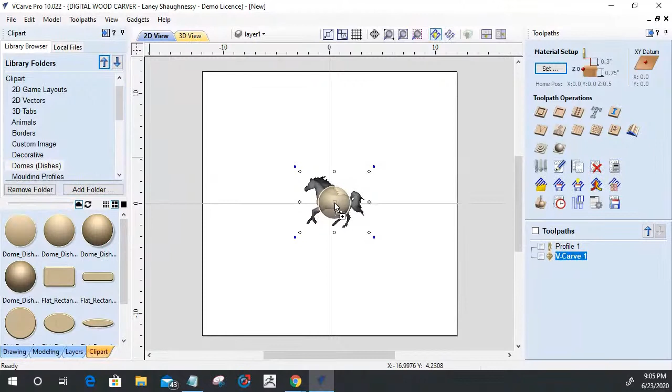Even if I was doing the standard model, let's say that this horse was the old man. I have a gallery here called domes and dishes, and depending on the angle of the dish or dome I wanted to use, I could drag that in to the model, and we'll size it up. Let's go into the 3D view on this—right now I brought that in as a dome, so it's covering the horse.

What I want to do is go into, and I'm in VCarve Pro here, I want to go into that dome's properties and turn it from a dome into a dish. And then I'm going to decrease my dish height—I only need it to be 1 inch deep. I'm on a big 24-inch by 24-inch board here. Let's close that.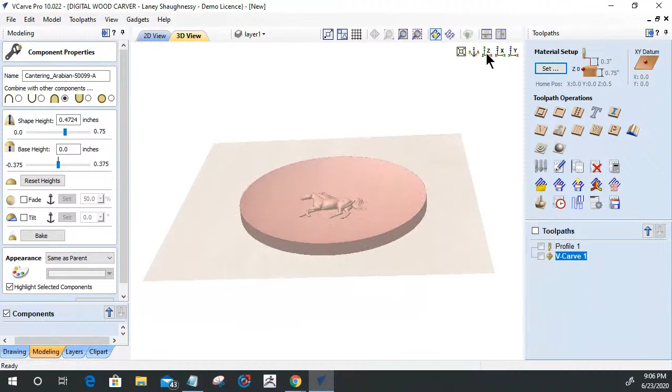Let's take the horse here, the cantering Arabian, and turn this up long ways. Let's select our Arabian here and size that up—hold your shift key. And this Arabian, I want to add this to the dish, and therefore it will follow the contour of the curve of that dish and things.

Once I have the model laid out, in the case of the old man, it was just an old man model, Father Time or whatever, those tree people you'd see models of on eBay or Etsy. Once the model is laid out, I'm going to add a zero plane to this—that'll give me my surface of material. There we go, so I can see my dish inside my material. And then 3D rough cut to do the rough cut.

First thing I got to do is set up my material size. Right now my material is only 3/4 of an inch thick, yet my overall model height and thickness, all of it from the bottom of that dish to the top of that horse's body, is 0.9816. I need to adjust that size to fit within my material, or adjust my material accordingly. Well, I'll adjust to fit in my material.

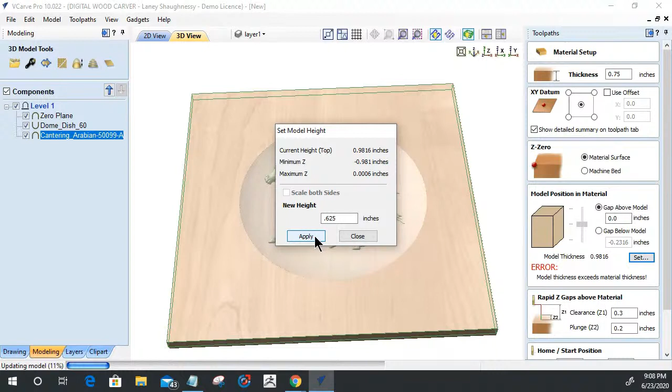So I'm going to go 0.625 and click apply. The key thing to this is I want my model at the top of the material because I want my router bit to make a nice transition down into that dish. And also I want the model at the top of the material with a 0 gap above the model. And click OK.

Then on my rough cut, because I have a 0 plane, that's considered the model, so I don't want to use the material or the model as the boundary. I want to use the selected vector, and that's going to be the outline that I put around this model. So on my dome and dish here, I'm going to put a boundary around it, and I'll use that selected vector as the boundary.

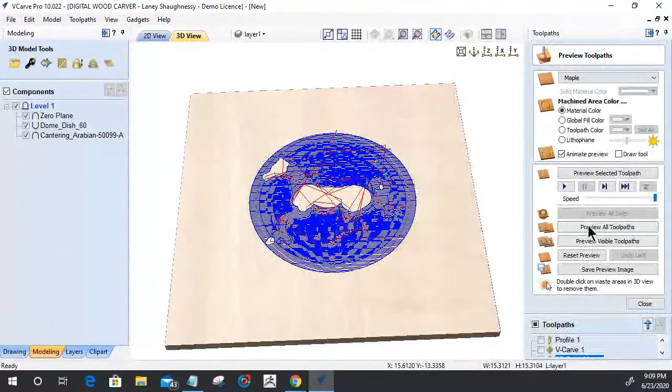I'm going to do a Z-level raster along the x-axis with the grain of my material and calculate that. So we have that rough cut that's going to hog away that waste material and everything.

With our rough cut done, then we have our finish cut. We're using the selected vector as the boundary because the 0 plane is this whole piece of wood right here, and that is considered part of the model. So if I use the model as the boundary, it would want to surface all the way across this, which makes no sense because I'm only milling that dish area.

So my finish cut, again using the selected vector as the boundary, I'm going to use a 1/8 inch tapered ball nose in this case, that'll be fine. Selected vector is the boundary. I'm going to raster 0 degrees along the x-axis - 90 would be along the y. I'm going to go along the x, and we'll calculate that and let it calculate out.

Troy says, why is it when I export a file to a PDF and then print it, a lot of the lines are too light to see when printed? It's a good question.

So what Troy is referring to is when we have a vector - let's minimize that and go back into... sorry about the audio blinking in and out every time I turn my head. Oh, I'm an idiot, let me just right click on this.

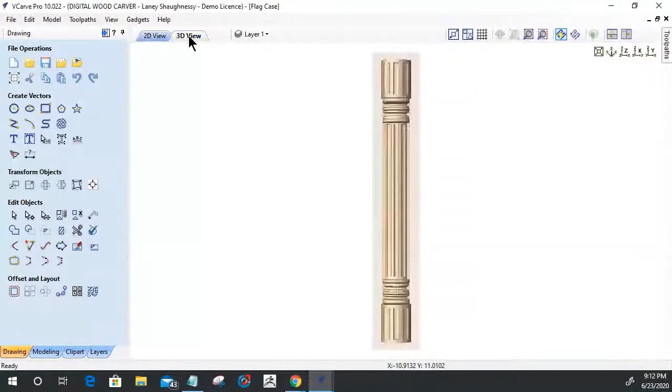So this was the baluster. I don't have really any vectors - do I have any vectors in here? No. Let's see, we'll use this as an example - staircase baluster that I did.

So what Troy's referring to, if I take these vectors here and export them out as a PDF, I want to export the selected only, default sheet, export the job bounds and all the layers, all visible layers. Click on export. We'll call this baluster files, and I'm just going to throw it on my desktop, and I'll throw it in the class file folder and hit save.

And if I come and open that PDF up... come on, File Explorer, don't do me wrong.

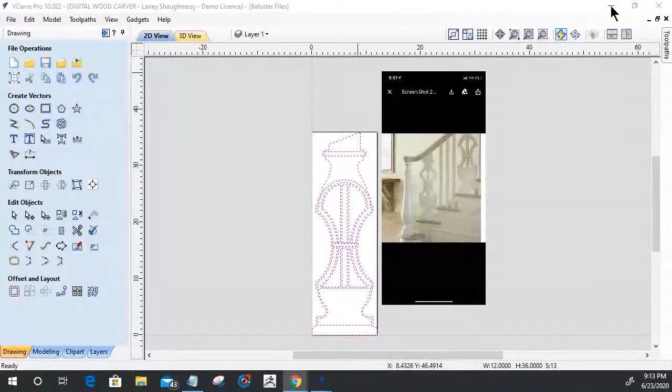Go to my desktop, class files. Let's see here, baluster files. And if I open that PDF up, sorry, everything is real slow. This is untypical of the actual operation of the computer. Sometimes my internet's slow, but not my computer itself. So it's died. All right.

So as you can see here, we have our darker lines and then we have our lighter lines on the contours and things. Why is that? I honestly have no clue, Troy. I really don't. But one of the things that I do when I'm printing it is I convert it, I print it in black and white, not grayscale or anything like that, and usually it'll bring out those lines. But that's not necessarily the best answer for it, right? But why it shows up, and everything is so slow. God, now just to get a file open. Why that does that, why it only shows the lines and not the curves and contours.

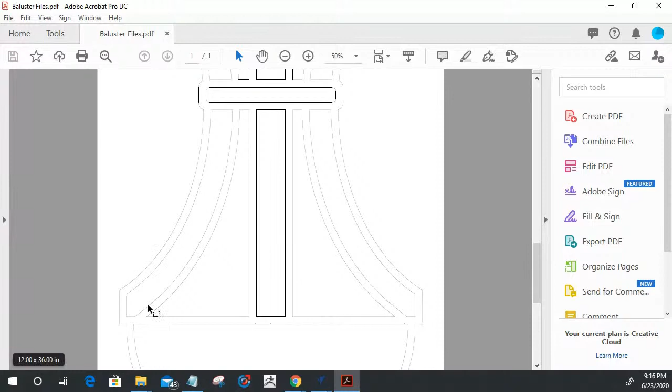And you say, well, wait a minute, there's a couple of lines there, Laney. No, those have a slight angle to them. If they were a straight line, they'd be dark. But no, actually, I just made myself a liar. These are lines here, I know that because I drew the damn thing. Those are straight lines, there's no curve or contour down here. So now why it selects some and not the others? I don't know. I do not know. That might be a good question for me to ask Vectric, right?

So I'll have to ask them what the deal is with that. But usually, because it is a grayscale, if we change the print quality to black and white, it might come out fairly decent. It's still going to be lighter than our big black areas here. But I honestly, Troy, I don't know the answer, I just wanted to show everybody what Troy was referring to. I don't know why it does that, what the particular reason behind it is. I thought it was just the lines, but no, there's lines down at the bottom of the design that aren't showing up. So why it picks randomly some areas and not others?

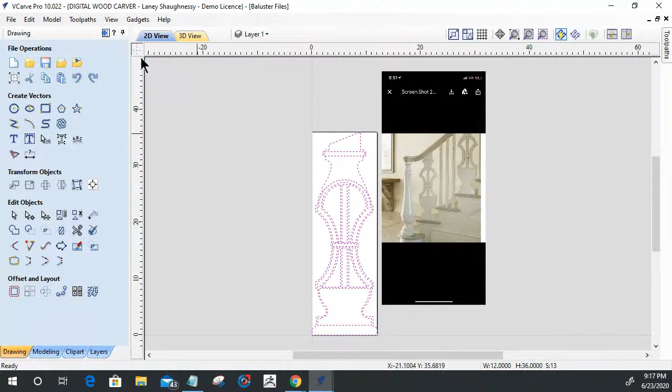No clue, no clue. All right, let's get back to here, and we'll preview that finish cut while we're talking. We've got our finish cut, and that finish cut is going to be a nice transition from the top of the board down into that dome. And whoever asked about rough cuts, this is why I do rough cuts, so that finish bit has very little material to remove. It can just focus on clearing out that material and working on that detail. I want my end mill, my workhorses, no pun intended with the horse on the screen, but my workhorses, my end mills, to do the heavy lifting, do that rough cutting and all.

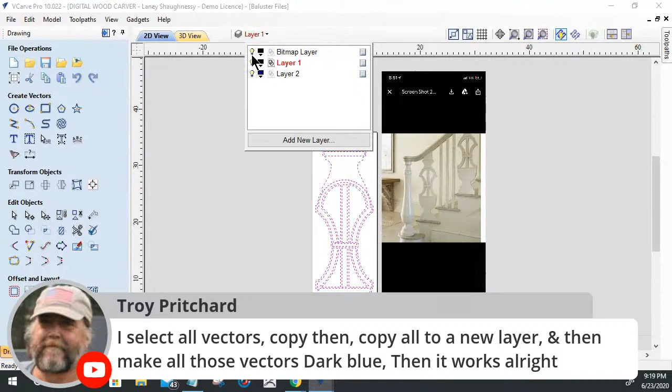Let's see here. I select all the vectors, copy, then copy all to a new layer, and then make all those vectors dark blue. Then it works all right. There you go, so you found a workaround for that. That's good. So basically he takes all of his vectors, copies them to a new layer, turns that layer to a dark blue, and then they come out all right. Pretty cool. So basically copy to a new layer, and in that color, he's using kind of a dark blue, so that way when you're looking at that layer, they come out. And also maybe by having it selected, maybe that does something, right?

So let's see here, layer 2. We'll kind of do a side-by-side comparison. So we'll have a black layer here, nothing selected. File, export as a PDF. Select here, hold on a second. Yeah, layer 2, I'm sitting there going, wait a minute, what layer am I on? Sorry, export PDF. Don't select that. File export PDF. It automatically selects the vectors when you open it, so it automatically selects that. So yeah, maybe changing it to blue helps, right? So do that, good call.

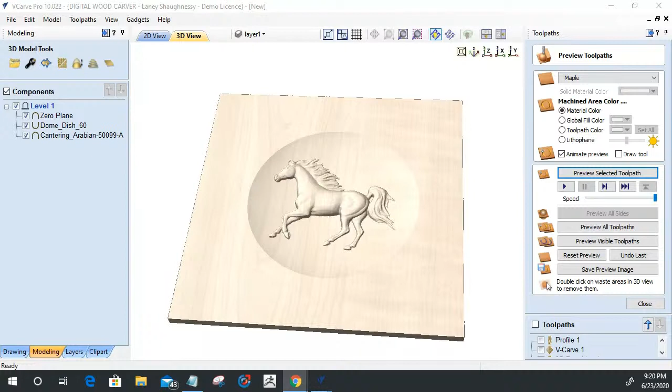Why export as a PDF? That's another good follow-up. So just recently, like at version 9, or was it 9.5, they finally gave us the ability to export as a PDF.

The main reason I use PDF is because most big companies, like a glass company, when they need a pattern to cut out for me, prefer it in PDF format. Same with sending my shirts for printing T-shirts - they want the design in PDF. If I'm doing a river table with river glass instead of epoxy, I'll send my vectors for that pattern, exporting them as a PDF to the glass company. They use that PDF to cut the glass piece out, so it fits my part perfectly. Most large print companies prefer working with a PDF document, so that's one of the main reasons I export as PDF.

Number 2, I print out as a PDF when laying out blueprints and stuff. If I need a cut sheet, like that baluster file, and I want to throw measurements and dimensions on it, I can export those out as a PDF, take it out to my workshop, and I've got a miniature blueprint for my cut list. So that's the main reason for a PDF - mostly being able to export those files to a big print company or whatever.

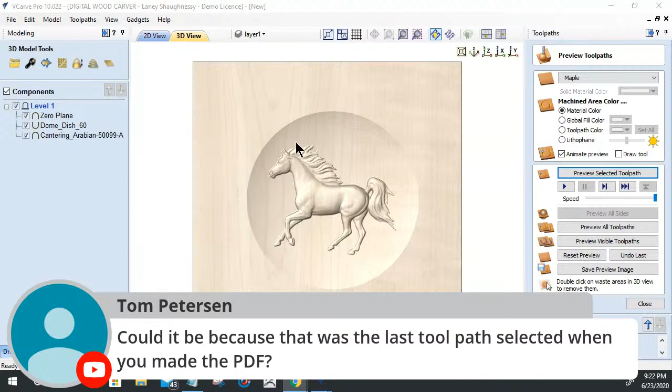Could it be because that was the last toolpath selected when you made the PDF? I don't know. I don't think it has anything to do with the tool path. As far as the vectors go, like you saw when I exported it out as a vector, it automatically selects those vectors. I'm not sure exactly what the reason is - I'd have to ask Vectric and get their input on why it does that.

How does the end mill know how deep to cut? On a rough cut, in the 3D rough cut we've given it a parameter, the machining allowance. So anything from the top of my material down to my model, leaving 40 thousandths of an inch of material above the finished model - I don't want my end mill carving my model. I'll leave a skin of 40 thousandths, a little under 1/16, that my finish bit has to remove. Based on that machining allowance parameter, the end mill knows to cut from Z0, the top of my material, down to my model, leaving that skin of 40 thousandths.

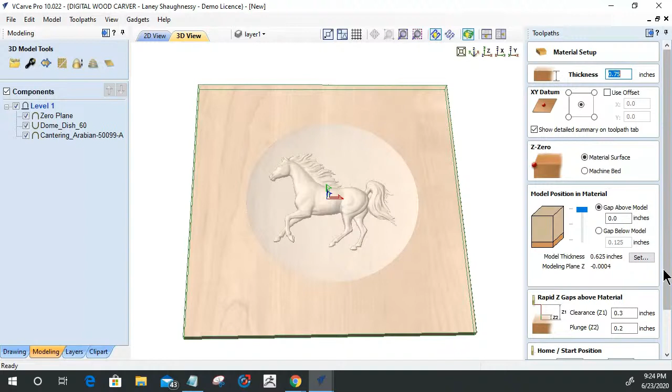For the depth of the model, if we look here, the model thickness is 0.625, and the model Z plane is 0.0004, so the total depth is 0.6254. It's going to leave 40 thousandths, 0.04, so it cuts down to 0.6254 minus 0.04, which equals 0.585 of material - that's the depth of cut. It does the math for me, based on your model thickness and your machining allowance in the rough cut. And of course it's only going to cut down to where the 1/4 inch bit can fit. That's how it knows how deep to cut.

Ba-da-ba-bum. If you print that file, all the lines print to the same darkness. Well, that's pretty cool. Yeah.

But why export to PDF just to print? One, for blueprints to take out to my shop. Two, to export that file to a glass company or cabinet company, so they can cut other parts out for me to the exact same size - they require a PDF file. My computer is not hooked up to a printer, so I put them on a flash drive. PDF is full scale, there you go.

Yep, I meant vectors, but you just checked that. Yes, yeah, yeah, Tom, vectors, exactly. I knew what you meant. I knew toolpath was kind of a verbal typo, but I knew exactly what you meant.

Do you ever use rest machining on something like that, Horse? Well, rest machining is only available in Aspire software. And if the toolpath called for it, then I would do rest machining to optimize the cut and help reduce some of the runtime. I can't do rest machining in VCarve Pro or Vectric VCarve Desktop. But if I was in Aspire and if the design called for it, then I would do it.

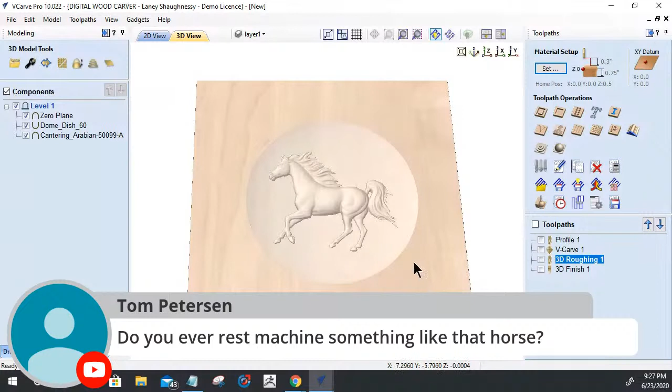It doesn't call for it in this design. There's not enough detail for rest machining. I mean, you could still do rest machining with a smaller bit to do around the horse and the mane and things like that. But for a project this size, I just use a 16th inch end mill, and my time would be much less than someone doing a finish cut, a rest machining cut, and a rough cut. I could just do my rough cut and my finish cut and finish quicker with the same results as someone doing it as rest machining.

So there's a time and a place for rest machining, and this particular project's not the time or the place. It would be adding time. It wouldn't be helping me any. It wouldn't be benefiting me any.

Let's see here. All right, Troy, you have a good night. I appreciate you, have a great night. And I'm gonna do the same thing. We're about to sign out here, so let's see here.

Michael, I'm gonna grab Mr. Michael Casey here. Where do you get clip art at? So now there's two forms of clip art, right? The models in the Vectric software are referred to as clip art. There's some great places to get clip art models: Designandmake.com, eBay, Etsy, Turbo Squid, cgtrader.com - there's quite a few places, Thingiverse. But as far as clip art, like image clip art for tracing and stuff, google.com.